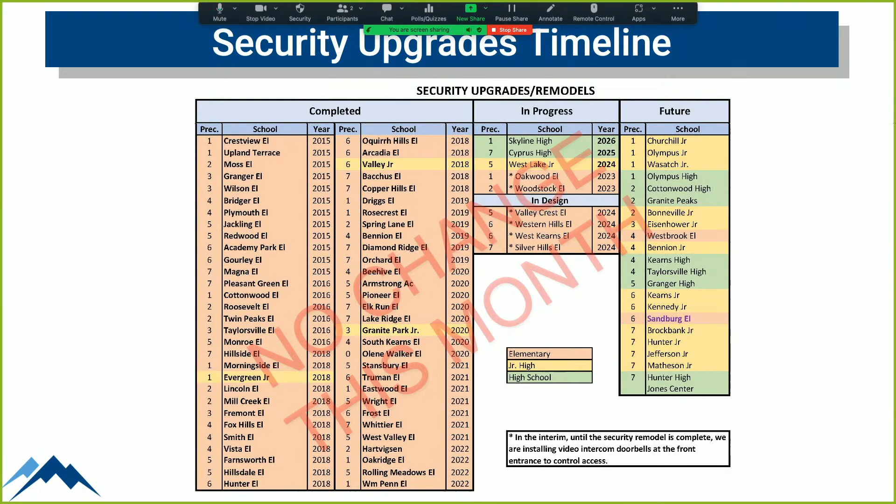So we are just in the process of finishing up Woodstock and Oakwood. I updated the slide a teeny bit this afternoon after some visits yesterday and today, and we're getting much closer on both. I updated the percentage - it says 70% complete. Still waiting for some storefront to be installed and some paint and just a few touch-up things, but we're moving very quickly on those.

Here's a photo looking out the new vestibule through the new doors we've added, so that forces you to come into the office before you go into the school, and then you can be entered in, then you go into the school from there.

This is the same plan as Diamond Ridge, if you've been there. This would be for both Oakwood and Woodstock. Woodstock is a little further along - they actually have some of their millwork installed and countertops are there. So just some finishing things, but they're way ahead of schedule, which is good news. I know the staff is anxious to get in there, and we'll make it on time. We may, hate to promise this, be a couple days early, so that's exciting.

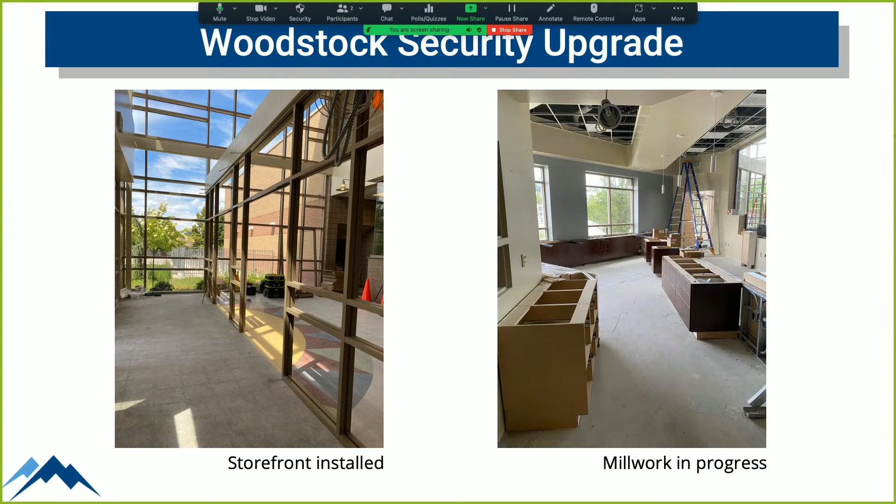There's a couple slides of the cabinets that have been installed. Countertops are now on, though that slide's a little older. And then again, the storefront - the picture on the left is looking at, as you're standing in the secure vestibule, having to come into the office where this picture is being taken from before you can go into the school itself. So making good progress.

We'll jump into the ongoing construction projects throughout the district. Roofing projects, Westbrook and Arcadia. The punch list you can see there - the Westbrook project is just finishing up with punch items, small things to correct. Arcadia is very much on the heels of that, just a few small things left, but 99% complete.

Good work there. Bonneville Junior, the stage lighting - we're getting the materials next week, we've been told, which is great news. Once that gets here, they can get those installed and move towards completion, which is exciting.

Even more exciting is I got to go yesterday to Cottonwood and listen to the new sound system, and it is awesome, it rocks. The same people that installed our sound system at Cottonwood High School, Performance Audio, did the installation for the South Valley Performing Arts - they're on 54th and just west of I-215. And they said this one's even better sound system than that one. So it's exciting, I did listen to it, and it does really rock.

Tomorrow they're doing a punch list, making sure everything works, the mics and all that good stuff. So good shape there, and that will be exciting for the school and any future performances or rentals or anything like that. So that's good news.

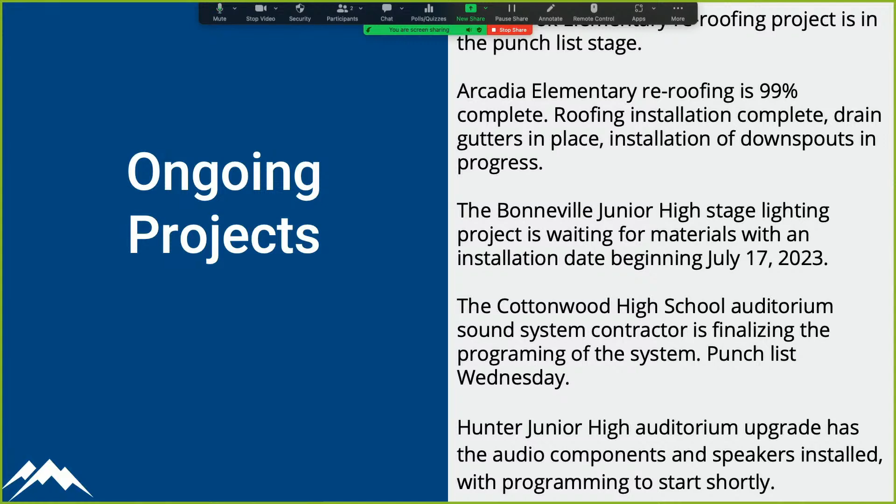Hunter Junior High School auditorium upgrade - the components have been installed and just waiting for some programming to finish up. It should start this week, and so just on the heels of this next week or so, get that one done, and we can check that one off as well. So that's good news for Hunter Junior.

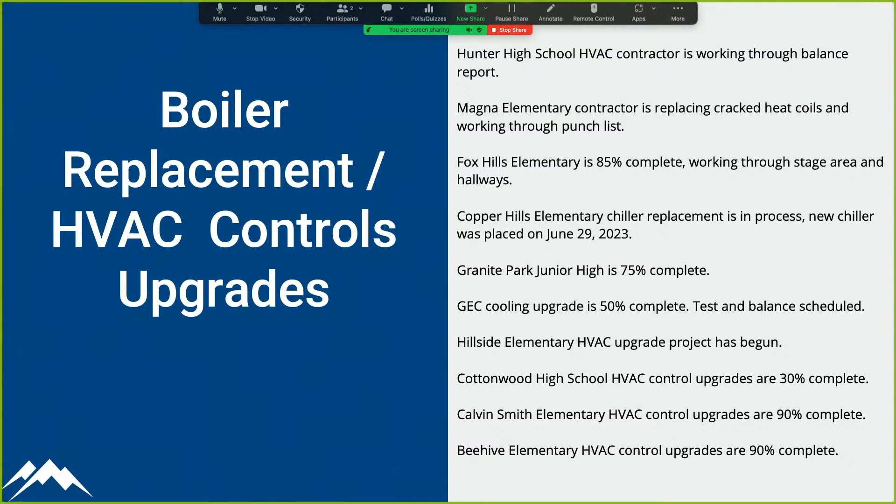Hey Ben, can I make this any bigger? Your screen, is there any way to make that bigger? No? Okay, I'll get closer to the screen. How's that? Actually, I could probably just read it off of here. It's probably better. Escape out, that's fine. You can make it bigger this way. Oh okay, that help? A little bit. Thank you.

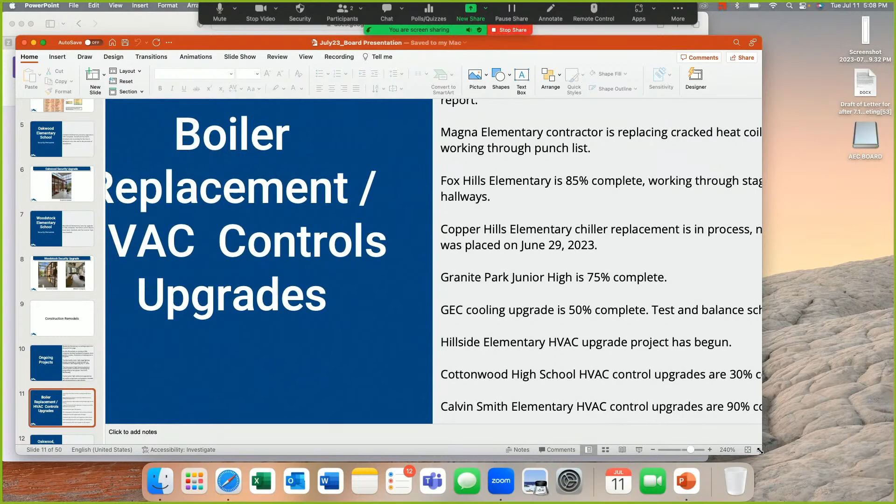As far as HVAC projects, boiler replacement and upgrade on controls, there's a list of projects you were given in your board packet. As far as I was told yesterday, talking with our folks working on those, these percentages are all accurate. In fact, this is probably a week and a half old, so they're making great progress on many of these projects.

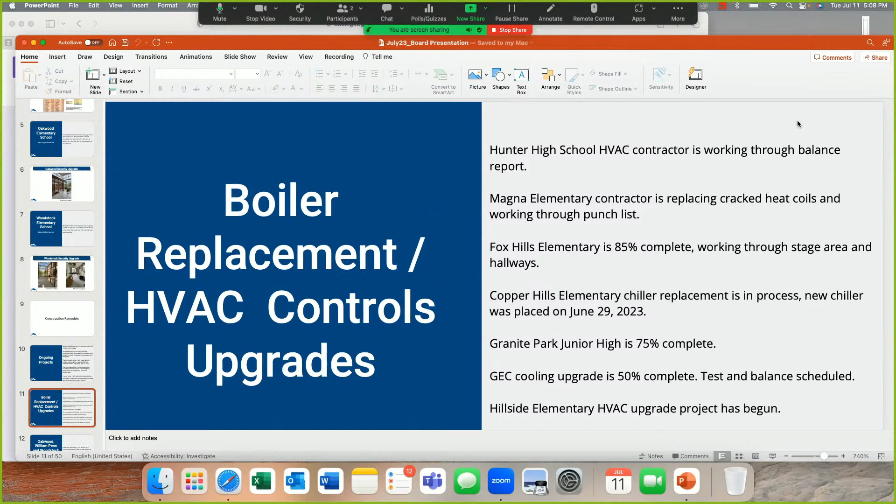You can see high percentages on Fox Hills, Granite Park Junior. The cooling tower here is over 50% complete, scheduled for test and balance, and the list goes on. So a lot of good things happening this summer with the hot temperatures, but they are working quickly inside to get our HVAC systems buttoned up and moving forward.

Oakwood, William Penn, and Woodstock, the three schools we're remodeling for the consolidation, are just over 30% complete. Toured those yesterday and they feel good about those. We're a little nervous, so we'll make a phone call tomorrow with the owner of the company to make sure he also feels good about those.

All the demolition's done, the materials are there, it's just a matter of getting them all installed in time for school. That's not the concern as much as their completion date of July 28th, so 2 weeks away. That's what we're concerned about, making that, but if we make that, we're fine with school. So we're pushing. We'll make a phone call tomorrow and make sure they understand the importance of those classrooms being buttoned up and ready so kiddos can be in there for the start of school this August.

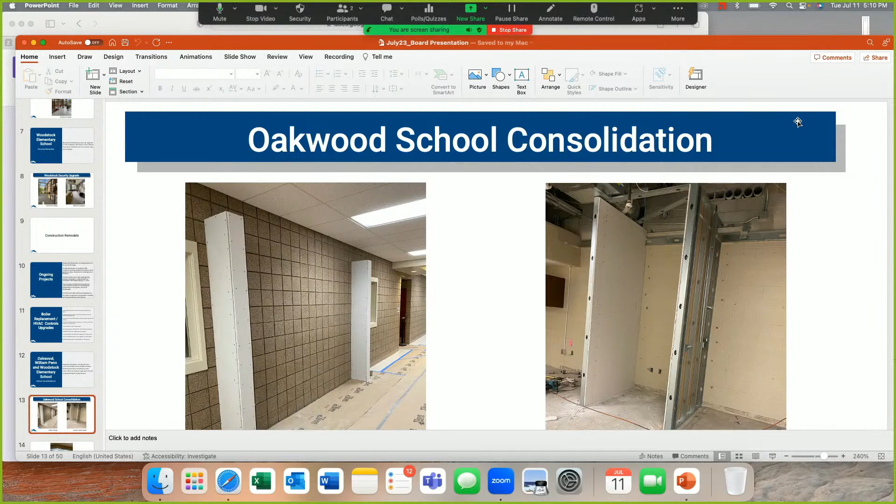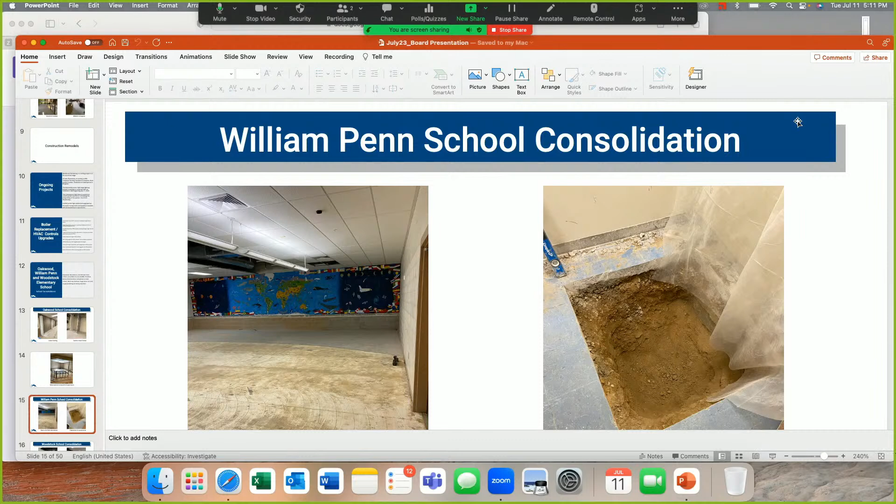Here's a few pictures of that work going on. Again, these are a couple weeks old, but you can see what's happening in all three. The demolition's all done, and it's just a matter of now putting back. They have some big structural steel they have to put in this room that we're dividing so they can hang the dividing door and dividing curtain, and that's happening even as we were out and about today.

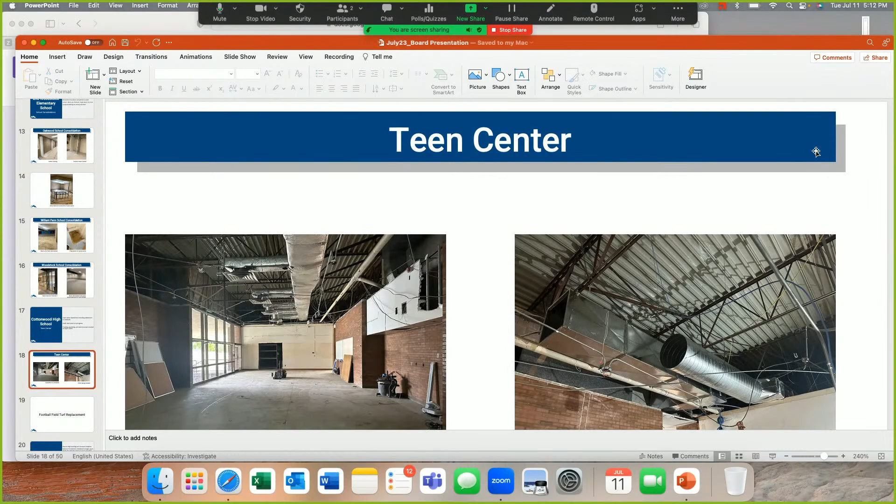Do you want to go back to the presentation mode? Sure, whatever you'd like. Thank you.

The football fields - Kearns has 30 yards of green turf down and the yellow end zone on the north, so that's exciting. And they're moving very quickly there.

The crews will bounce from there to Olympus. The turf is at Olympus, so we've got the turf in town and at the location of the school. They're just finishing up a little bit of fine grading, and then they can have the installers come and

install the Olympus turf right after Kearns. And then Cottonwood, there's still a few things to do at Cottonwood. When we move the track, the long jump and the high jump events down into the field, into the bowl, there's some concrete work there. So that's why this one is just a little bit further behind the other two, because there was more work to do to get it ready for the field, including running the cannons that cool down the system.

So making good progress. The turf arrives this week, and the contractor told us just this week that even if all the concrete on the outside's not done, he'll start in the middle with the turf and work his way out so that he can meet us. He knows his deadline is July 28th for all three. It's the same contractor for all three fields. So he assured us that won't be a problem.

He also assured us he does this every year. They have 14 fields between Utah and Wyoming that they are taking care of. And he did not seem stressed in the least, but I think if we had 14 fields and we only had 2 weeks left, I'd be a little nervous. But he said this happens every year, and he's got good crews, so we'll see progress there.

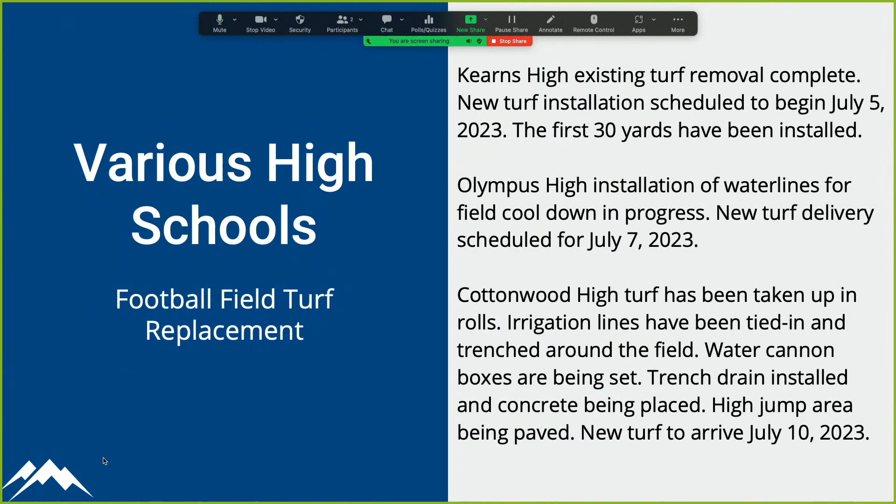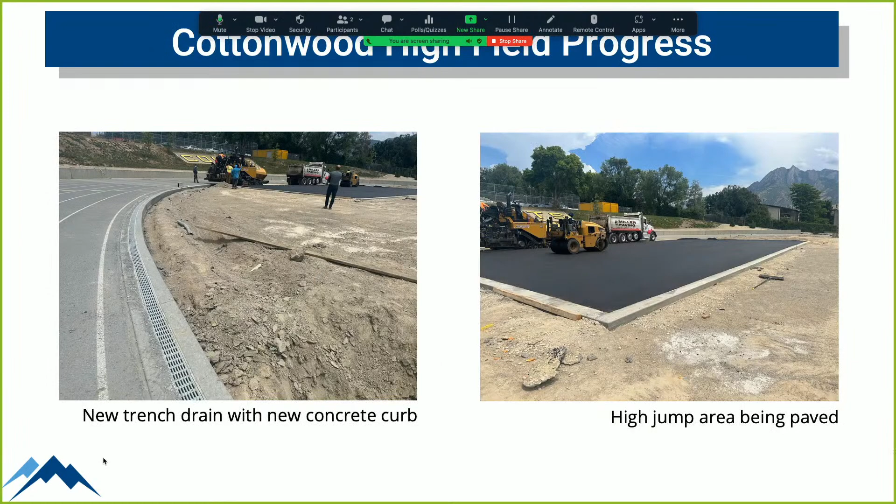Kearns High School prepping for this. Again, every day is a whole series of new pictures, so these are older, but good progress there in the fields.

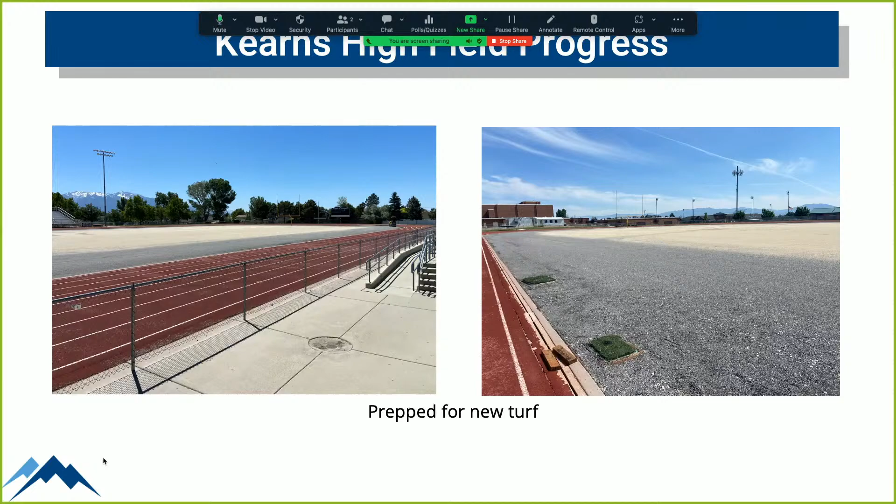Jump to West Lake. I'll show you the pictures here in just a second, but it's a whole herd of ants running everywhere. On the very south end, the furthest ahead, they're hanging drywall and taping and mudding and getting ready for those kinds of finishes. As you work your way north, they're still dropping in roof joists and decking and putting in the roofing membrane and insulation.

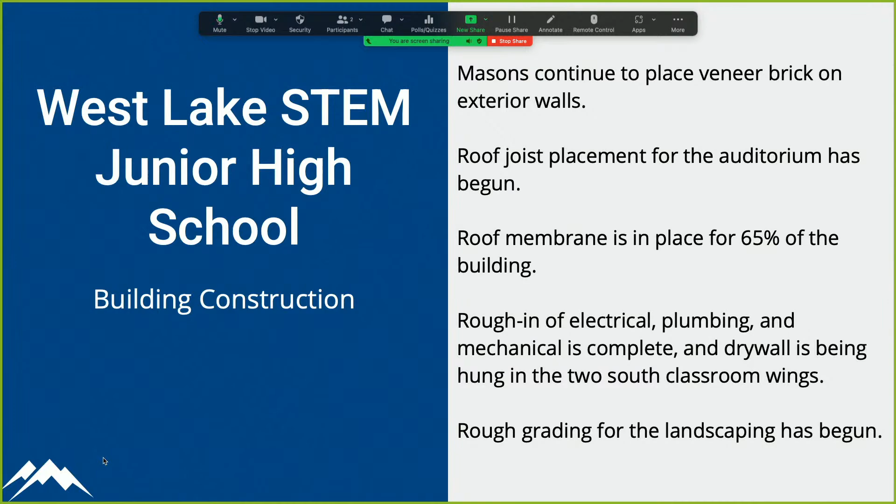I'll show you that. So the first picture there on the left is looking at the two-story. This is from the south, maybe almost from the McDonald's parking lot, looking towards our new media center and teacher collaboration hub. The media center is upstairs there, and the teacher collaboration hub is the lower one, and that will be exciting to get the glass in there and have great views.

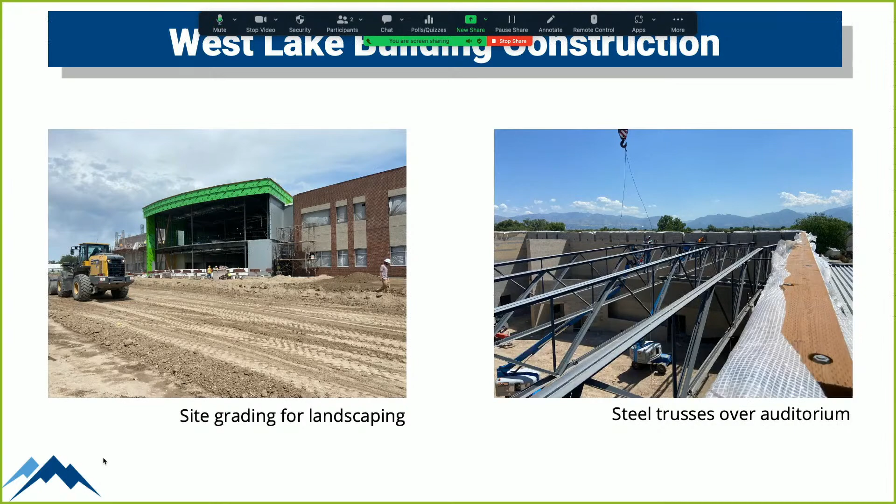You see the steel trusses here in the picture on the right that are over the auditorium. Those have all been installed, and so they're decking the auditorium now, which is exciting, putting the metal deck down. You see the mezzanine in the auditorium there to the left, and then framing in the commons areas.

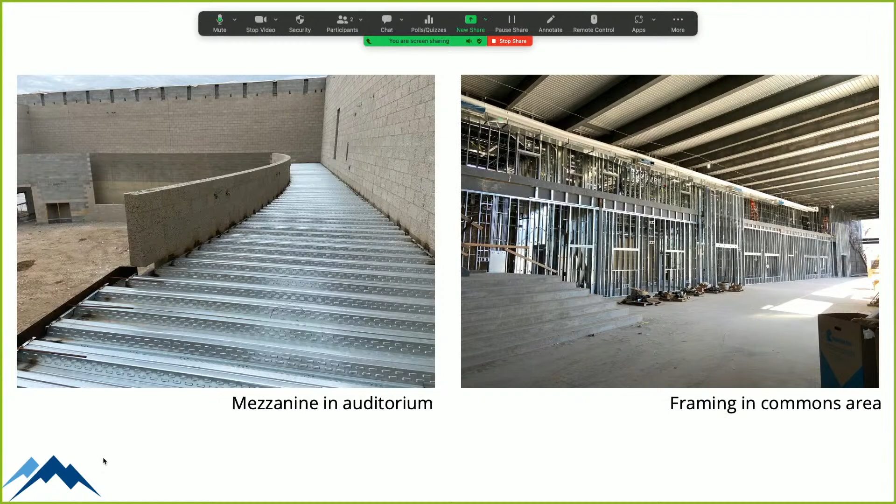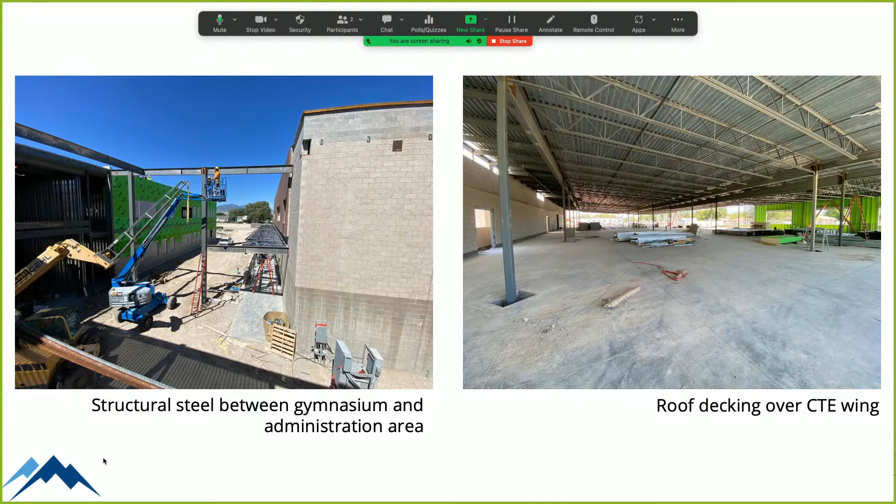Structural steel happening as we exit out to the north. They're still dropping in structural steel members and working their way out of the building to the north. The CTE wing, that picture there looks like a giant warehouse, but it's actually got metal studs going in now, and they're starting to divide that space, so it's taking shape as well as far as the individual spaces.

It's coming along very nicely and exciting. I was out there yesterday looking at a fence issue, and they're working on site work too. So it's really taking shape. Hogan's doing a good job there.

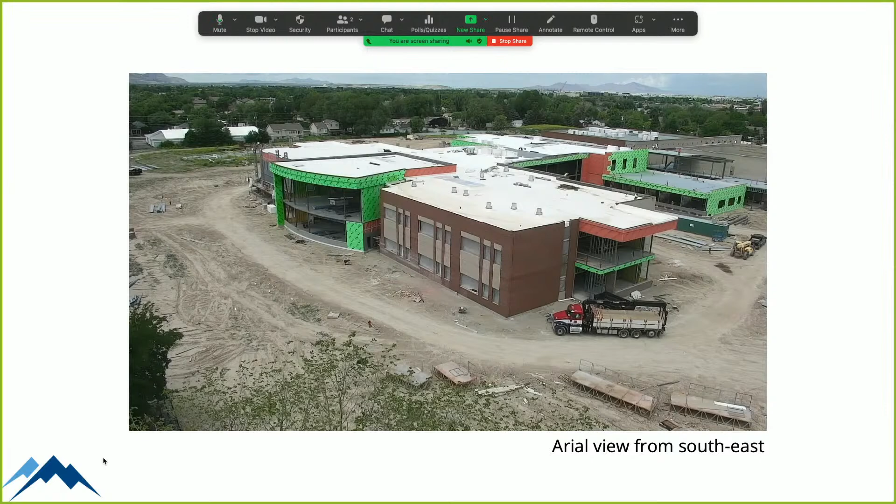And then as far as the change orders, there were no change orders this month that needed to come before the board for Westlake. Any questions on any of those items or projects?

I'm going to let Chris now talk about Skyline and Cypress.

Thank you for the opportunity once again to talk about the progress at Skyline and Cypress High Schools. June was an extremely good month for construction. It was dry and actually really nice weather for most of it, so a lot of progress was made at both sites. If you were to go to the sites at the beginning or end of May, about the time school got out, to now, it would be a dramatic difference. Thank you to those who toured Cypress — there's even been a lot of progress since our last tour there.

At Skyline, most of the north side athletic improvements are completed. We've got a few things still to finish — a couple of driveway issues to complete, and quite a bit of lighting adjustments still needs to be done. We had the engineers come out and revisit, taking light meter readings to put some science behind the conversations we've been having with the north side neighbors to try to resolve those issues. Some of those adjustments — the shrouds — are being fabricated and made, and we're just waiting on delivery.

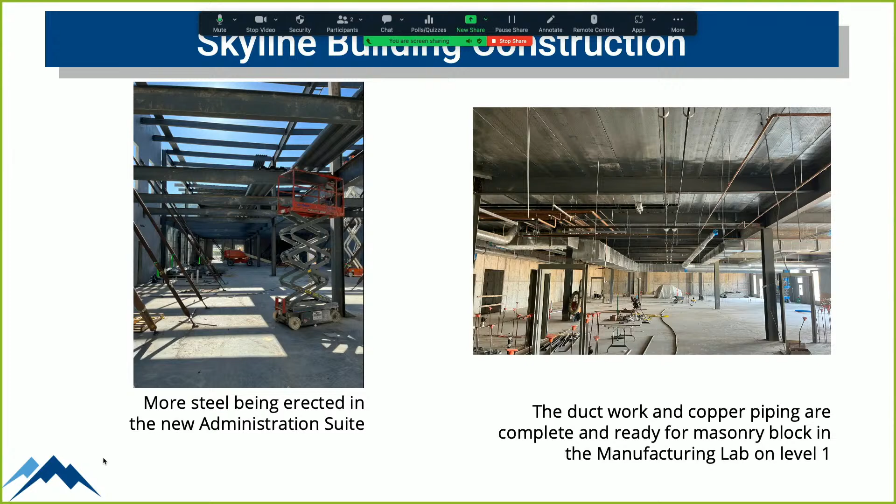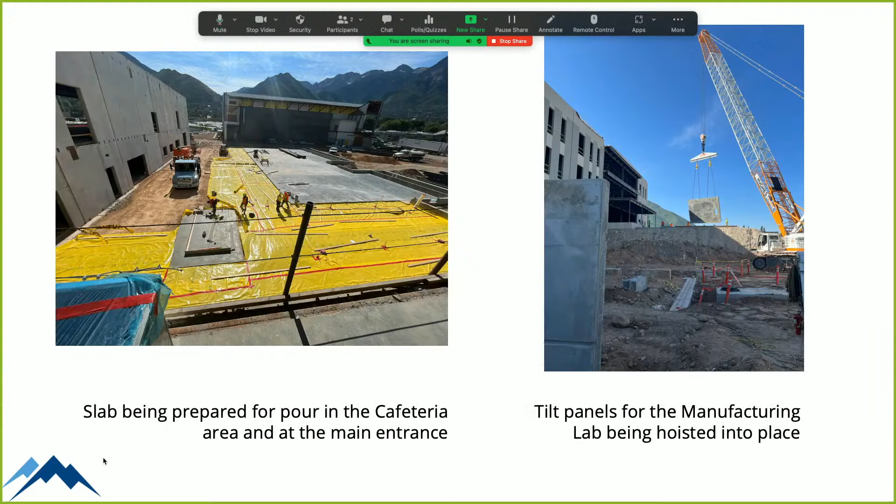The slab is complete in the cafeteria area, and quite a bit of steel has already been erected on top of that slab. Looking to the east, you can see the back of the auditorium building that will be demolished next year — 2025. Hopeful, wishful thinking on my part.

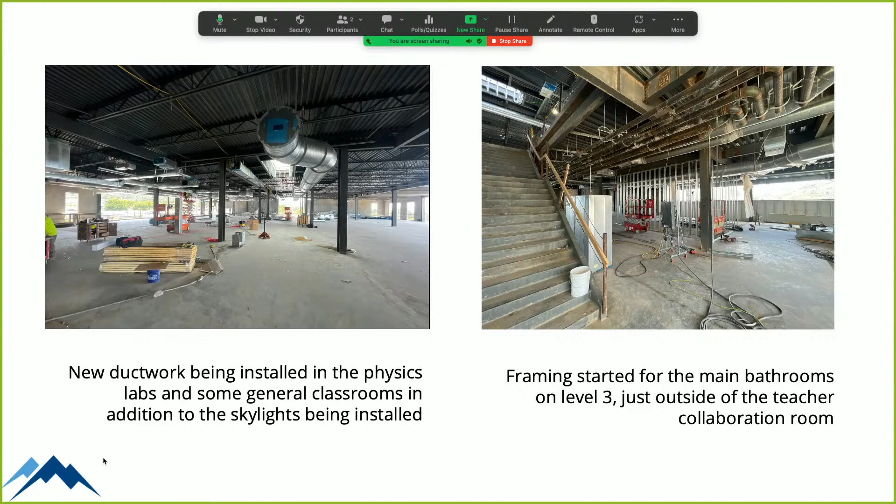You can see quite a bit of the ductwork, and actually I believe the ductwork is completed in this space currently. And then quite a bit of framing on those bathrooms is past that point now.

Here's the administration area. You can see the glass along the athletics area and the administration wing. And then the one little piece there, the vestibule area, that's the last little piece of the athletic building. That is the actual design entrance versus if you've gone into the athletic building in the last year, you've gone basically on what would have been the interior doors.

Yeah, the temporary doors, and this is where the main entrance for the athletic building will be and where the main display case for the trophies and such will be.

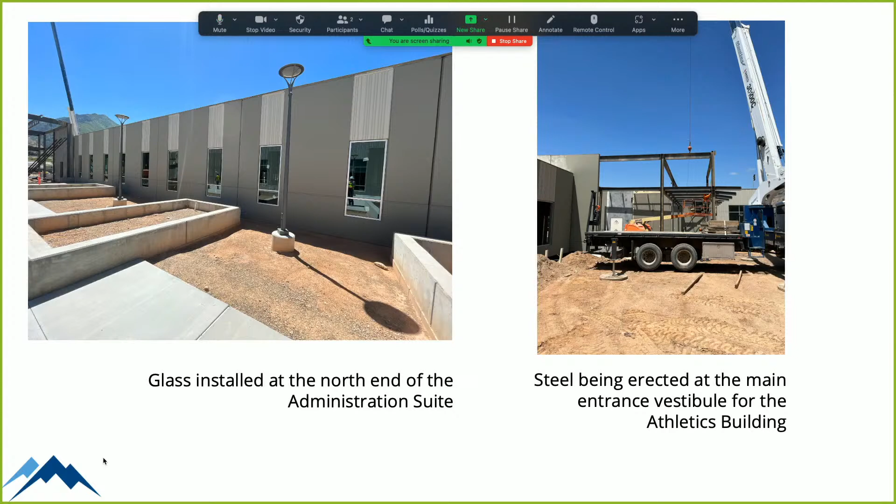And then these are the seat walls outside of where the new main entrance will be. And then, like I had indicated here, where the...

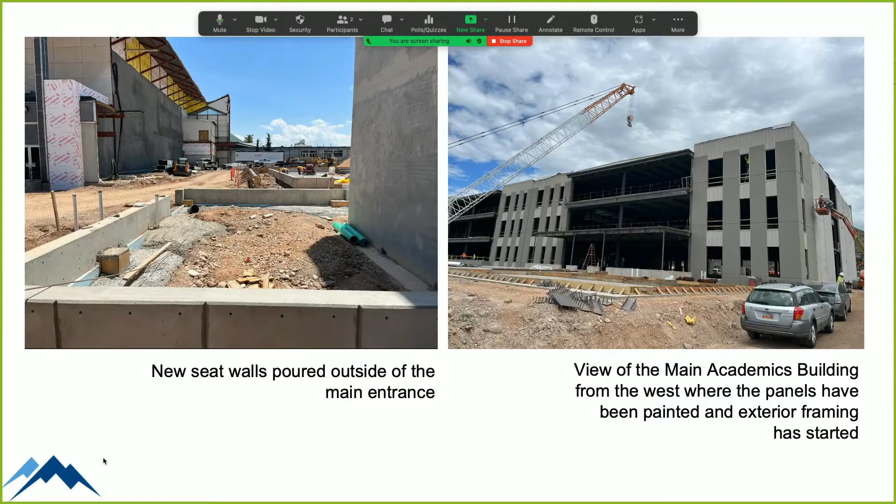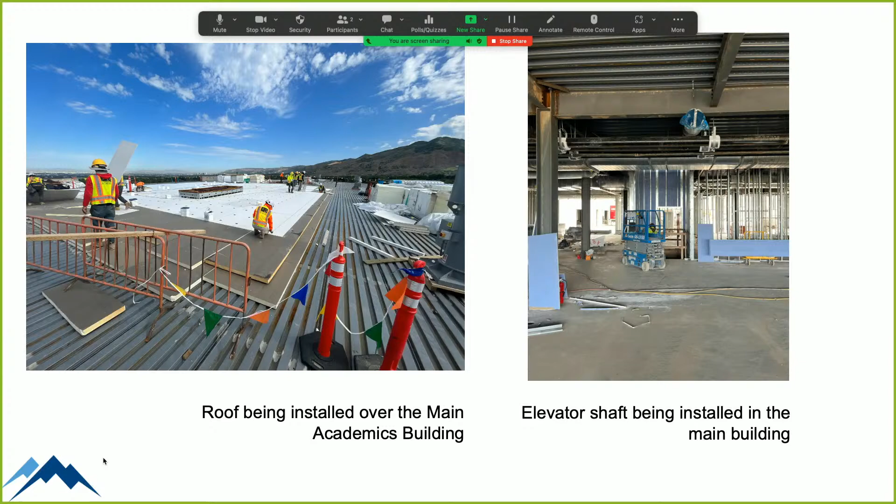Main academic building, we've actually got a lot of the exterior paint done, and that curtain wall will be installed later on this fall when we're completely dried in. And that roofing area is all completely covered in at this point. And we're waiting on the elevators.

So no changes other than Skyline, other than a few administrative changes. I just had a couple questions. I just want to make sure my expectations are managed here, so I'm setting mine out there.

We scheduled two years for the building of the academic building, right? And I'm assuming in my head there is a time in which you're working on the structure, and then there's a time in which you're doing the finishes. The structure time is where you're pouring it, so it's taking up a lot more space, more geography. My question is, how long does that phase take for the structure? And when we're just working on the finishes, do we have more parking?

The answer is the parking area is not relevant to the construction, at least for the academic wing, because all of that area that it takes to build the buildings, all of the workers are on the other side of the building. Does that make sense?

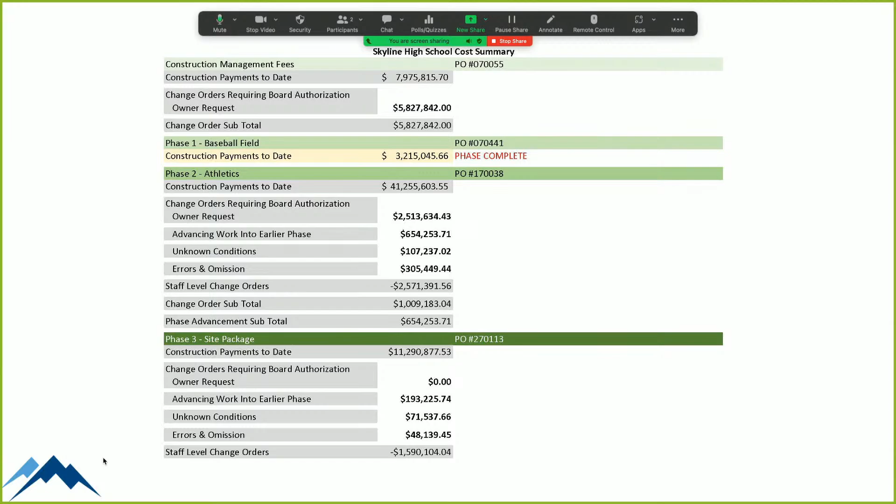It's looking good. We have been sharing their communications with the broader Skyline network just as a courtesy, to pass along the information from Mill Creek City, even though it isn't our project.

I appreciate that collaboration. Can I ask one more? I feel like I'm taking over the whole conversation here. Without opening a can of worms, which I fully feel that I am...

At both Cypress and Skyline, it seems like it would be a great moment in the building process, if there were any changes we could make that weren't going to cost a lot of money that would make teachers happy, to have them go look at the space. I remember our science teachers at Skyline had very specific thoughts about what their classrooms could look like and how the space could be used. And I have built my own home, and I know that seeing the space was much different than looking at the paper. I just wonder if there are plans to do that.

I wonder it with the caveat that I'm not interested in putting more money into those changes if they're significant, and some of those things we might have to just make do about. But if there were small things we could do that could make a difference, I would want to. And I think the way to make those is with teacher feedback.

It is a bit of a concern, because every faculty member would want to go, and that is a huge safety liability that puts on our two contractors. They would push back a bit. If we really insisted, we could talk through that.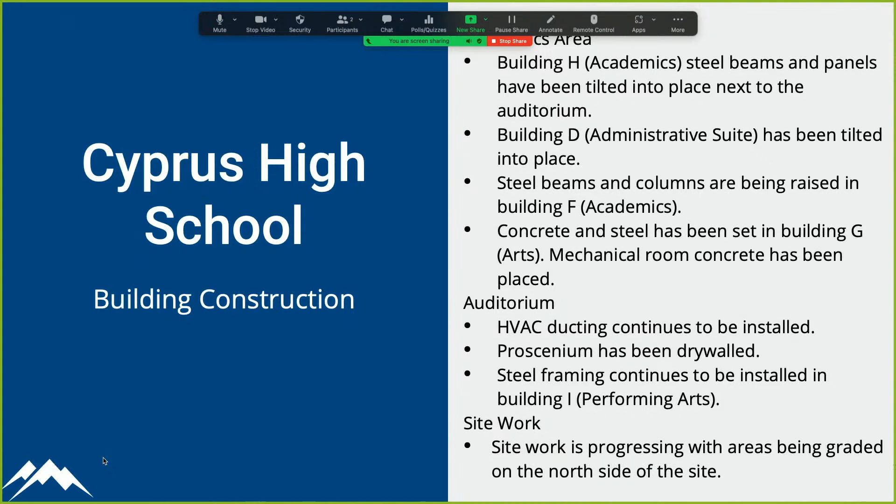The site work is not progressing as well as we'd like. We'd like to get some of the parking lot areas done since we had to deal with Major Mudd and his staff last winter, and we'd just as soon get at least the first lift of asphalt in so we don't track mud into all our buildings.

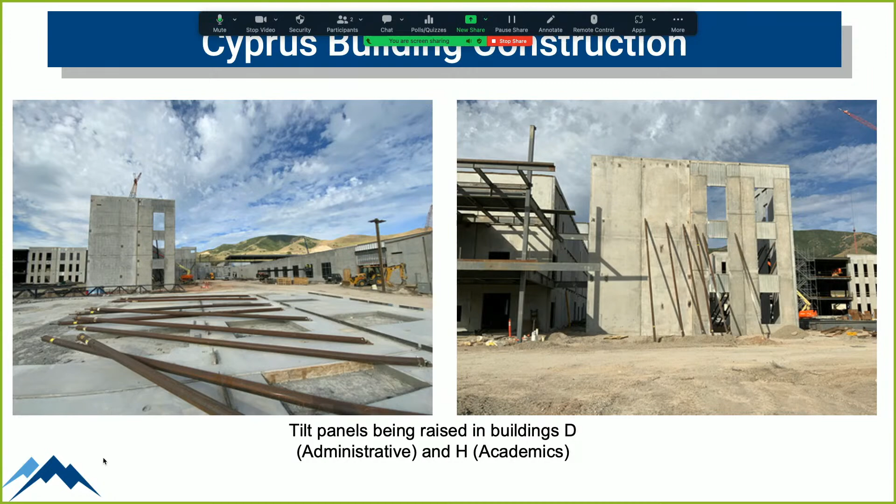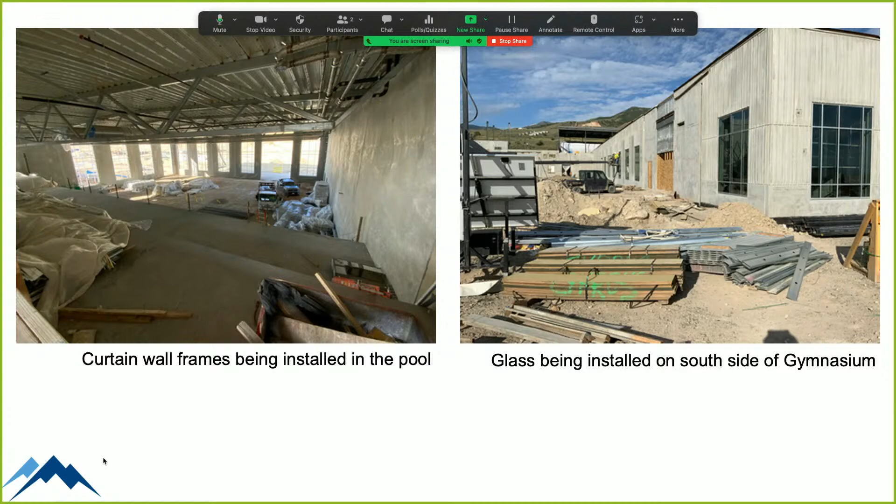As you can see by the pictures, these additional administrative wings and other areas have all been stood up this month. We've also got more roofing put in over the athletics area and more site work done, along with some curtain wall frames, and quite a bit of the pool area has been dug out. And here's the glass we put on the south side of the gym, with our first little rock going through a window.

We're very pleased with the progress. There's still some disconnects on the schedule, but we feel there's plenty of opportunity for them to hit the schedule as currently planned for completion end of May, beginning of June of '25, as on contract. So they've still got a whole lot of work to do.

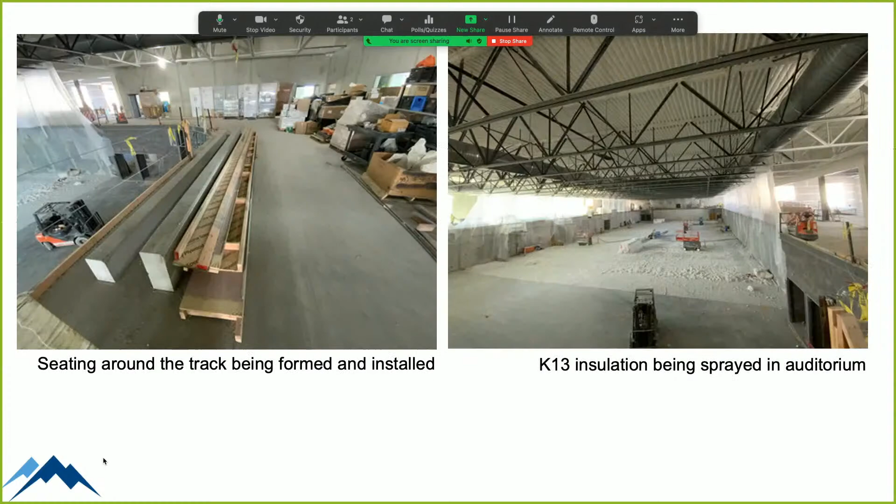As you can see in the room on the right, it's really starting to come together. Some of the benches have actually been completed, at least the masonry for those, and we're very pleased with the progress so far.

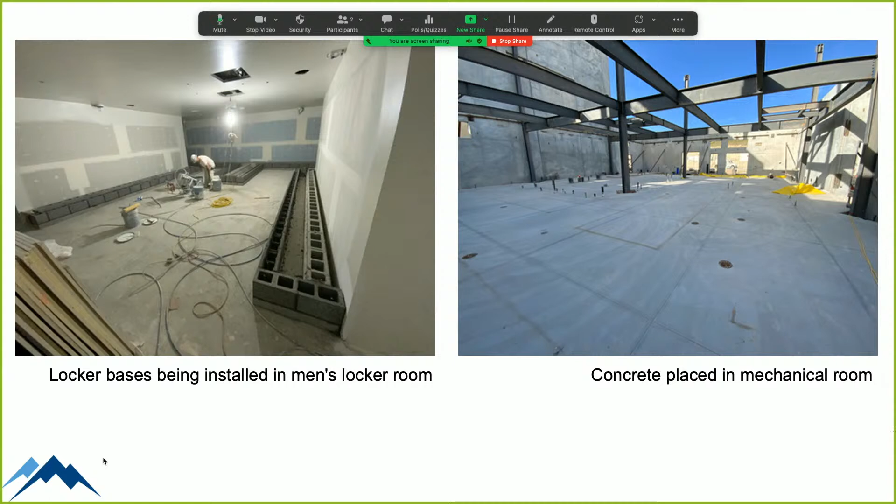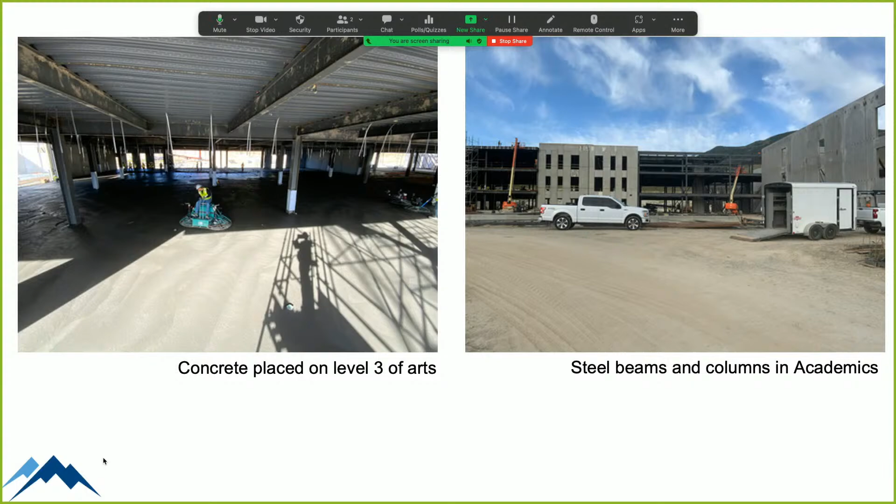Like I said, there's a few challenges. Here's the locker bases for the installation of the lockers, and the weather's been very good to us. We had a little bit of wind yesterday that made the crane a little difficult—I know wind at Cyprus is shocking—but we're actually doing really well. We could use some real effort on the site at this point to get everything cleaned up and take advantage of our lovely dry summertime.

As far as changes go, I believe we have one change for 183R3. This was a change that was reviewed and requested by staff for changes to the special education and adjacent classrooms. This was issued last fall to the contractor.

If you look at the letter we sent, you can see they originally responded with pricing back in December, and it sat in the architect's court for about three months, about the time we came on board. We got them to respond back to it, and changes were issued back in May. We reviewed it—there were some additional changes, about $20-some thousand. They hadn't issued sufficient credit to the district for the work that was supposed to be installed. Then through June, our negotiations with the contractor continued, and the architect completed their review at the end of June. We recommend this change be approved.